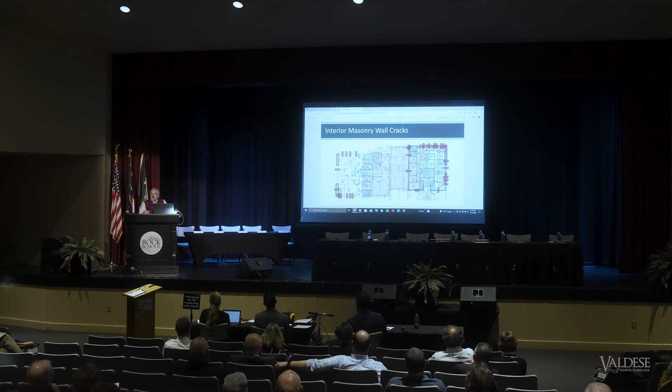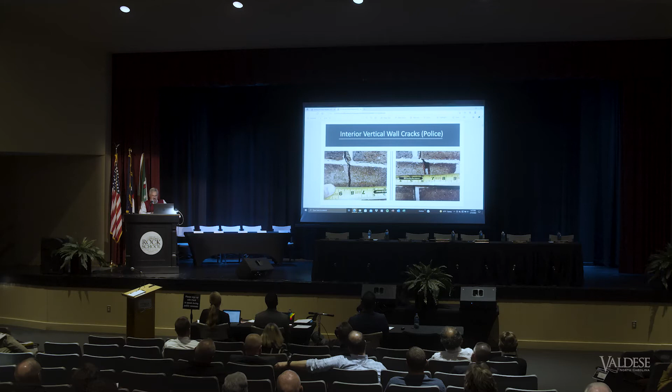We're seeing vertical cracks ranging in width from approximately 1/16 up to 3/16 of an inch, indicated on the left slide. On the right of the slide, we're seeing breakage where cracks have already occurred in the brick, exceeding 1/2 inch. These are isolated locations, not typical.

We're seeing evidence on the interior of a horizontal crack. This is on the police side, but you can see a blow up on the right, part of evidence we're seeing on the exterior. You're going to see wire sticking out of the wall right here. This is part of the steel wire tie laid in the mortar joint as the wall is being built, and these wall ties are laid at 16 inches on center all the way up the wall.

What happens is moisture gets into the wall, and over time these wires are not protected. This is very common for buildings built in the 1970s era - they're not galvanized, so there's no protection against rust and corrosion. What we're seeing is moisture in the wall causing the wires to corrode and rust.

On the exterior side of this wall, you're seeing freezing and thawing action. As moisture gets into the wall, anything on the outside of the insulation tends to freeze, and when water freezes, things expand. Over time in that cycle, the freeze and thaw is popping the mortar, and the rust is also expanding and causing the mortar to pop. So this is what you're seeing - the mortar joint starting to pop out of the wall.

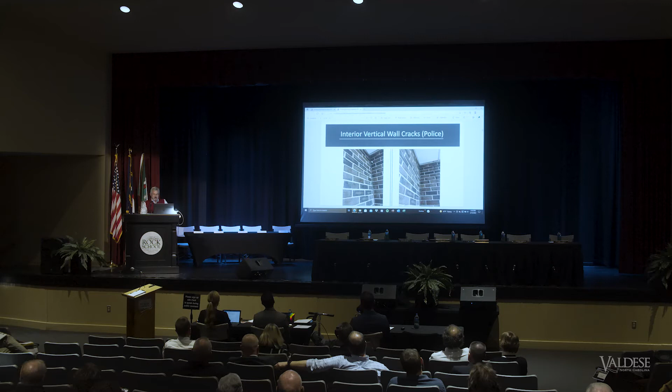You can see that the ceilings are separating from the exterior wall. Interior partitions are separating from the exterior wall due to that deformation.

This is a view of the south wall of the police department. You can see a faint image of horizontal lines at about every 16 inches on center. This dates back to approximately 2008. It appears that all these joints have been repaired. So this problem of joint spalling, where the mortar joint is popping out of the wall, has a history with the building. At this time, in 2008, the joints were ground out to a certain depth, and then mortar was placed back in the joint and tuck pointed in place. That was the extent of the work. There was nothing else done. It occurred from this outside corner all the way down the wall to the next outside corner, from the southwest to the southeast corner of the south wall.

Here again, you can see the pattern we're talking about with every 16 inches where the joints have been replaced.

This is a photograph off the east wall of the police, and you can see this is beginning to occur, which is what the south wall has been partially repaired for. The joints are spalling. The blow up is on the right. You can see the mortar is absent, exposing the wire reinforcement within the joint, and it's occurring at that same 16-inch pattern.

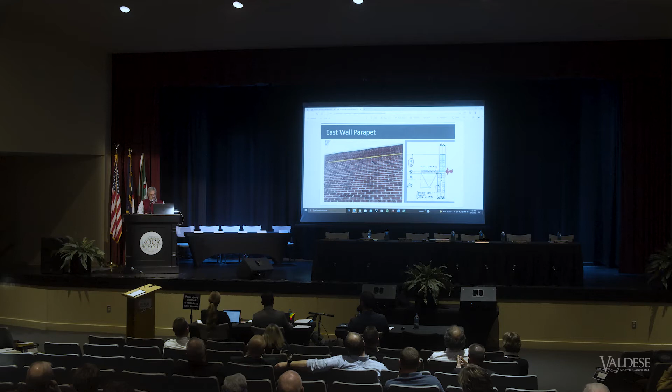Here again, there's a detail. This is the load-bearing condition where the crack's occurring. This is the detail showing the south wall where the wall is parallel to the roof structure. We're not seeing that same crack at that location.

Here's a diagram kind of showing a summary of what we're talking about with load-bearing condition. We've got the parapet 2 feet high. Then we have our wall ties that occurred every 16 inches in the wall. They're corroding. The joints are popping off at that 16-inch pattern. And when that happens, please understand the wall is constructed of a 4-inch interior width of brick, a 2-inch cavity which is filled with insulation, and a 4-inch exterior width of brick.

So it makes a total wall thickness to be 10 inches wide. Now, we can look at how the bar joist bears at this point. By putting in this wall reinforcing, it takes the two 4-inch walls and combines it as one 10-inch wall to give you a 10-inch load-bearing wall.

Imagine this is the interior, this is the exterior, and you have the wire reinforcing that holds it together. When that wire corrodes and breaks in two, there's nothing to hold this and make it a composite wall. So the load-bearing condition changes from a 10-inch wall to a 4-inch wall, which is what you see now.

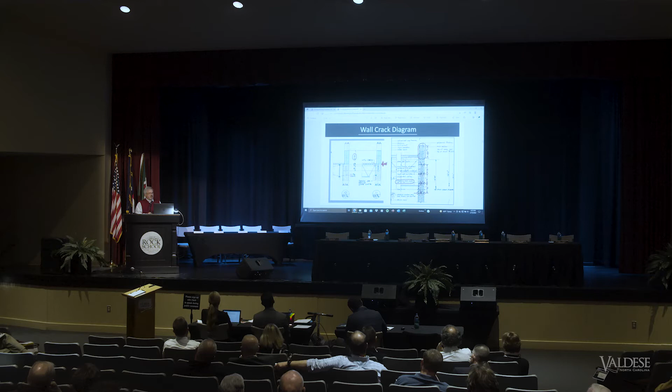And that is what was done on the south wall here in 2008. There's one more step that would go into repairing the wall, and what it is, we're going to refer to as stitching the wall back together.

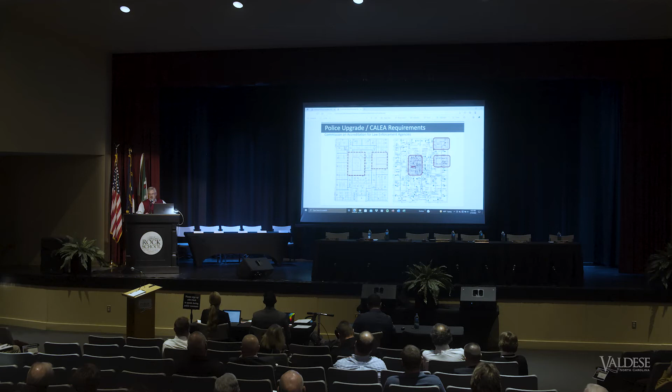Existing condition now within the fire truck bays: there are no floor drains for the vehicles in the northern bay, though there's a floor drain back in the storage area. In the southern bay, there are four floor drains. Currently these floor drains collect and flow out the east side of the building into the storm drainage system. They spill out to daylight somewhere across the railroad tracks from Town Hall.

This is an environmental issue because current building code now requires that floor drains, especially in a space with vehicles, must flow through a sand oil interceptor before they are connected and drain into the sanitary sewer system. So what exists now is an environmental issue, and it's also a violation of some of the town's zoning ordinances and stormwater protection policies.

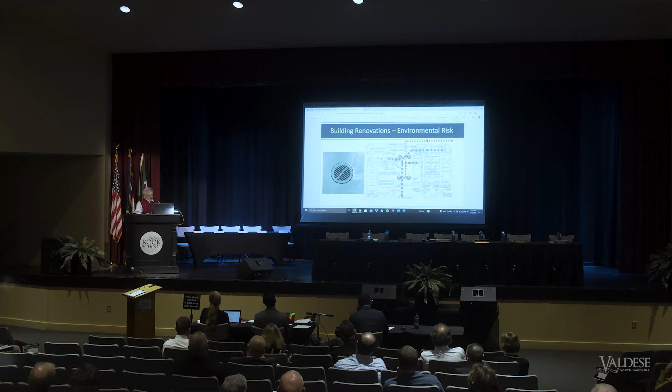One solution to correct it: first, we would divert that floor drainage to the west. In order to make that happen, we have to dig up the concrete slab and reverse the flow from the floor drains so the outflow goes to the west rather than the east. Since there is no floor drainage within the northern bay, we can add floor drains there, redirect the floor drains out of the south bay, collect everything into the sand oil interceptor on the exterior of the building, then flow into the sanitary sewer.

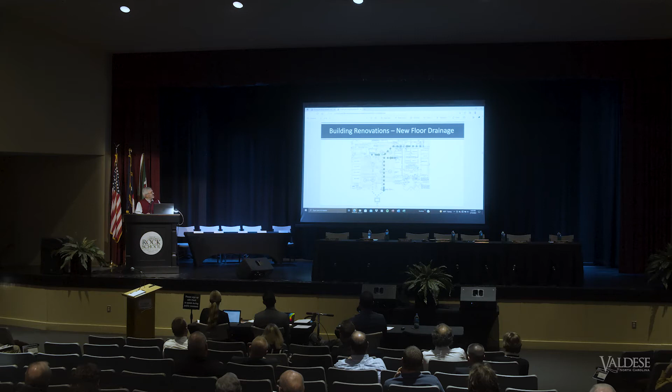We've talked about there being some events with water leaks. This is occurring in this area, which is near the IT space in the police department, in the southeast corner of the building.

The thought is that this may be some issue with the roof drainage. You can see here there are five roof drains on the roof. Currently these pipes dump into the wall, and the riser is within the 10-inch wall and flows down before it exits the building below grade. The thought is that somewhere in here there is a broken pipe, a loose joint, or something, and when heavy rains occur, it spills out of the pipe and comes up, with the force pushing it up through the wall.

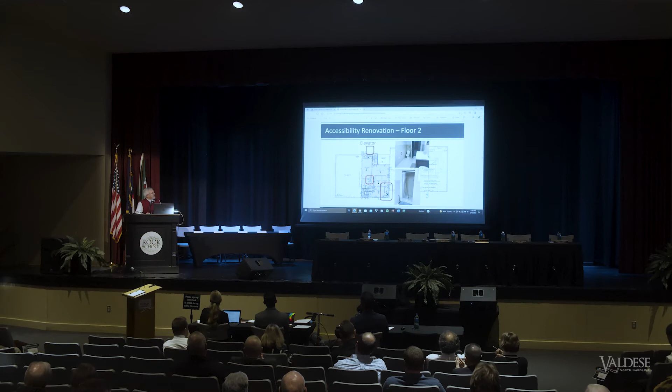Now we move to our next phase of building renovations, and what we're going to be talking about are items that are beyond the need for repair. They're beyond the issues we've talked about of damage due to water penetration and infiltration.

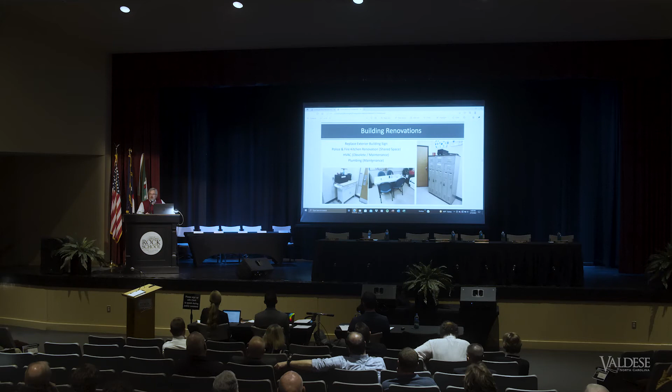Just a couple other items listed. The heating and air conditioning doesn't work over the old town hall, the north building. The systems work in the middle building and the south building, but the systems are old. There's a lot of maintenance required to keep things running, a lot of parts needing to be replaced, and age on the system means some parts are becoming obsolete.

Plumbing, we've talked about some of the plumbing issues, but here again, some of the plumbing dates back to the 1920s, and it's old. The pipes, what might have been a 2-inch pipe in those days, are believed to have corroded on the interior to where it's restricted the flow. There's a lot of plumbing issues and repairs that are ongoing within the facility.

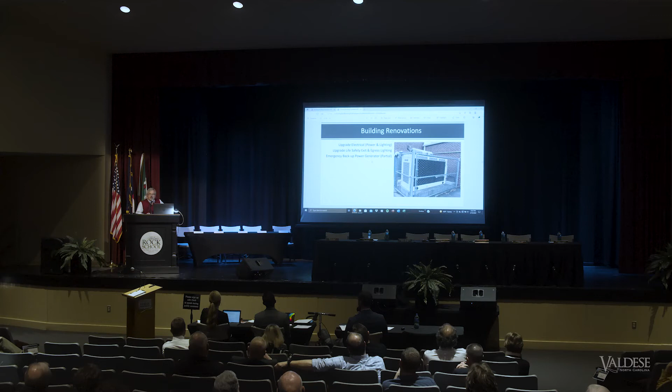There's a need for upgrading the electrical system, both for power and lighting, and an upgrade for the life safety equipment, being the exit signs, emergency signs, and egress lighting that's required. Currently there is an emergency backup generator provided for the facility, however it doesn't provide coverage for the entire facility. This is a 100 kW generator. We've looked into it, and the extra capacity for this generator is not sufficient to pick up the remaining portion of the building, so a new generator, new transfer switch, and additional electrical work would be required in order to place the full facility on emergency power.

This item is a very identifiable item for public safety facilities, whether it be EMS, police, fire, etc. It's classified in the building code as a Category 4 essential facility. Now, we've talked about building repairs to repair the building, but that does not get you to what we're listing here as a Category 4 essential facility. All repairing the building wall does is get you back to the state that the wall was designed for at the time it was built in 1975, 1978, and 1926. It doesn't renovate the building into a Category 4 essential facility.

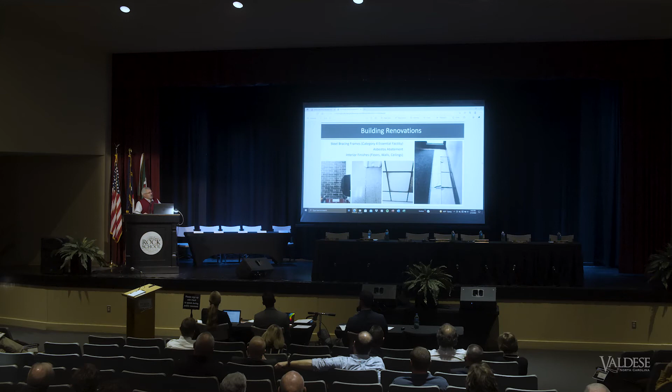So in order to do that, very invasive measures of renovation have to occur. Some examples: steel frames would need to be constructed either on the exterior or interior of the building, connecting the foundation, the wall, and the roof structure together to make the structure stiffer. A Category 4 essential facility provides greater resistance to lateral wind loads, but more so, it provides resistance to seismic activity. At the time these buildings were built, there was no seismic activity provided for in our building codes.

Think about recent seismic activity, maybe 2-3 years ago, there was a series of small earthquakes and tremors in the Tennessee mountains, North Carolina mountains. More recently, there was seismic activity in the Sparta area of Alleghany County. Just to note, the building walls in the condition they are in right now, being unrepaired, if we were to see any kind of seismic event, I can't tell you what magnitude, but a seismic event is going to give you this kind of force against the wall. They're already in a broken state, and with this kind of force, those walls have no resistance to lateral movement. They're only designed to resist the vertical load imposed upon them.

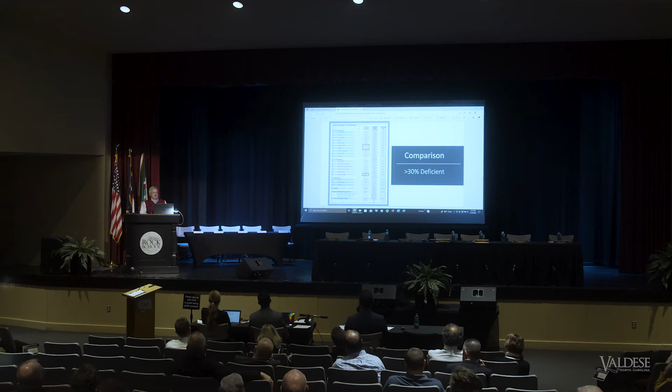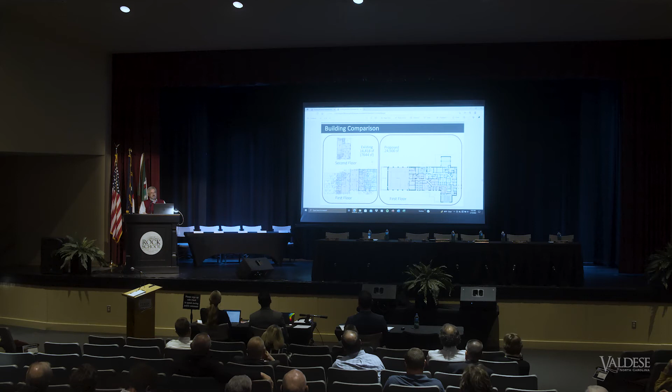Currently, it's my understanding the fire department has one shift worker who spends the night, so the one bunk room is sufficient. But if additional firefighters are ever assigned to a shift that spends the night, there will be an issue of male-female gender separation.

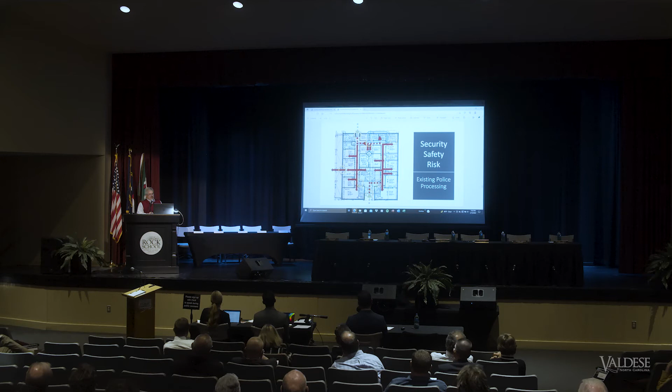In a new facility, we look at a safe and secure holding and processing area. The arrestee is brought in by police cruiser and parks within the sally port, which is double duty for arrestee transport and also large storage, such as vehicles taken into custody or large evidence that can't otherwise be stored within the building.

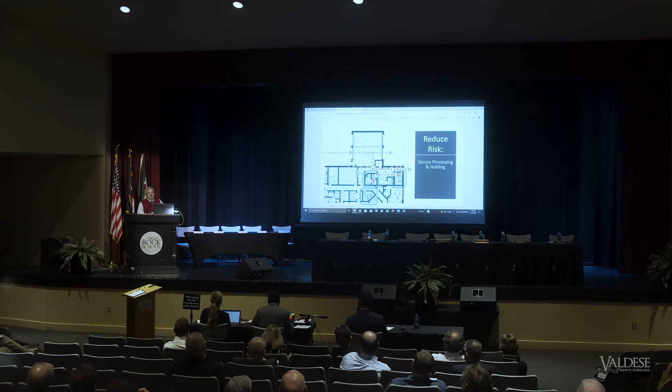These circles indicate controlled access points, electronic doors operated by personnel only, not free-flowing so anyone can walk up and open the door. As the arrestee is brought in, the doors are closed and secured, and they are escorted into the processing area. Once there, they cannot get out without an officer's escort, since the officer controls the door.

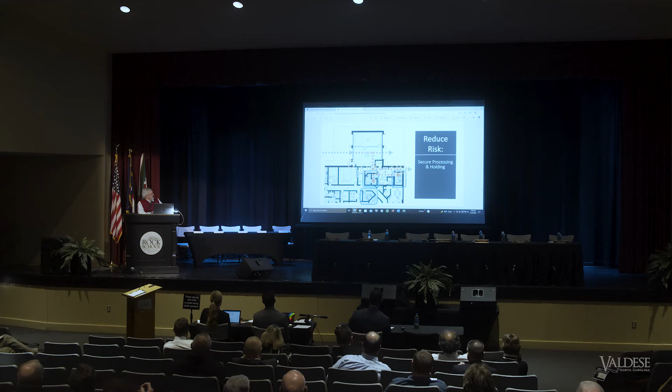Within this area there's a holding area and an interview area. This setup, while not within the secured area, is a multi-purpose room for small conferences that can also serve as another holding space. If a male, a female, and a juvenile are brought in at the same time, by standard they need to be separated and can't be held together. So there would be space to hold a male, a female, and the juvenile separately, keeping everything safe and compliant for holding and processing.

Once in this area, they are contained, and when the time comes that they bond out, they have their own exit, so no one brought in gains access to the rest of the building. It's in through the secure entry area and out through the secure entry area.

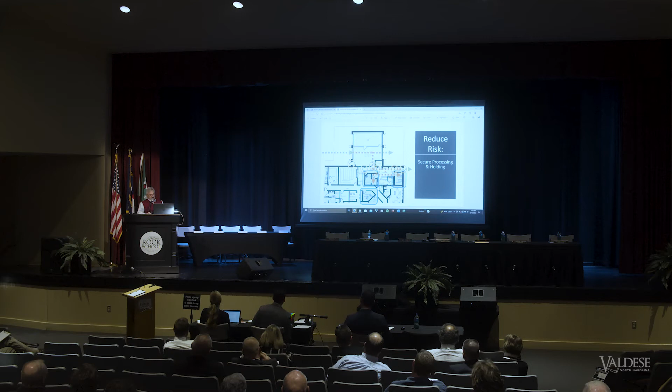When the fire truck cranks up or pulls into the station, it gives off exhaust. Remember, we have no ventilation system, so the exhaust hangs in the space and is absorbed by the turnout gear. If the engines are running while filling breathing tanks, there's a possibility of contaminating the breathing air, as well as contaminating the ice packed into coolers that go onto the trucks and out into the field with the firefighters.

Take a look at the apparatus space for the proposed new facility.

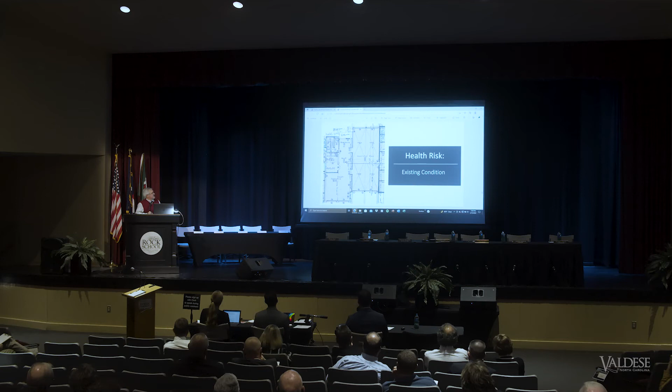This is arranged in a little bit different fashion than the existing building. The existing building has 2 drive-through bays and 2 back-in bays, separated by a wall that was an existing building wall due to construction, how things were added over the years. But this bay is 4 open bays, giving you a large space that vehicles can be pulled out of, and you can use it for interior training and activities.

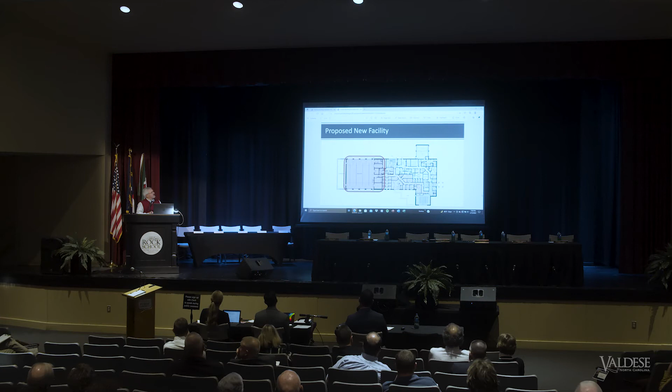More importantly, we have arranged bay storage areas that are immediately adjacent to the firefighting equipment. The turnout gear, which is located on the wall beside the fire engine, can now be located within its own isolated conditioned room with its own ventilation, its own washdown, and not have to share the same exhaust as the fire engines.

The air-breathing tank fill station, same thing, can be located within its own isolated room protected from the fumes of the fire engines. The ice machines can be located in isolated space protected from the fire equipment.

This is just showing a layout of how the vehicles are laid out in the existing building. The bays right now are approximately, in this part of the building, 15 feet wide and 70 feet from front door to back door, which is very tight. It restricts what kind of maneuvering and access space you have with vehicles.

It's very difficult to wash down trucks. They can store up to, with 2 back-in bays, storing now up to approximately 7 vehicles.

Limited flexibility, with the largest space that can be gained being 70 by 30, approximately 2,100 square feet. There is no ventilation, so there's the possibility that you could retrofit vehicle exhaust and ventilation. However, due to limited ceiling heights and limited width, it would be very limited. There may not be enough space to get all the equipment, ducts, rails, et cetera in to provide a vehicle exhaust system.

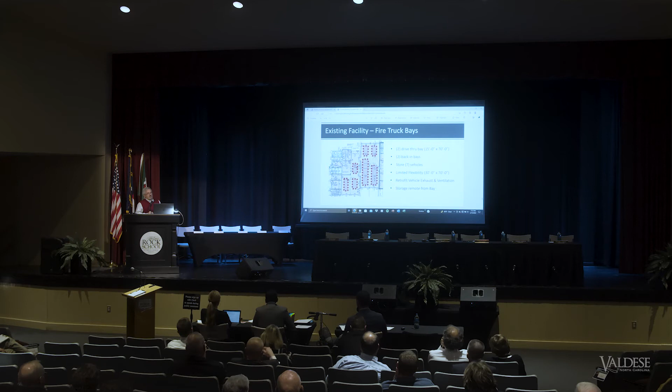And in this layout, most of the storage is in this part of the building, which is kind of remote from the bay and not immediately adjacent.

In a new facility, it can store up to 8 vehicles, treating as 8 back-ins or 4 drive-through bays. The bay sizes are approximately 20 by 80. You can get greater flexibility with an 80 by 80 space if you need it for whatever training purposes, 6,400 square feet as compared to 2,100.

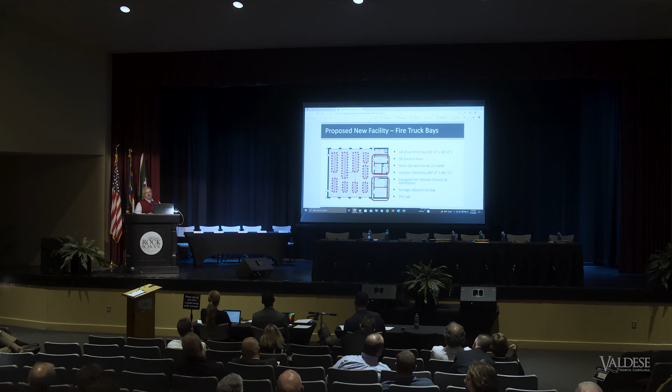This would have adequate height in order to be equipped with vehicle exhaust and the proper ventilation. And as we talked about, the storage would be immediately adjacent to the bay. A new facility would provide enough clearance in the ceiling height that the vehicles could have their cabs tilted to work on the inner engines, which cannot happen in the existing facility.

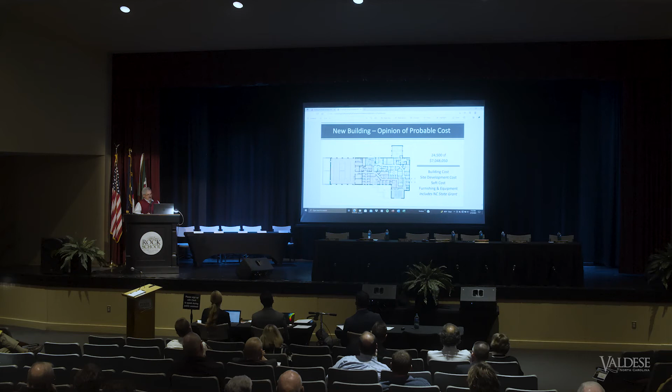That concludes the presentation that we have prepared. I hope we have provided more information than confusion, but I'm sure some of you may have questions that we will be happy to answer.